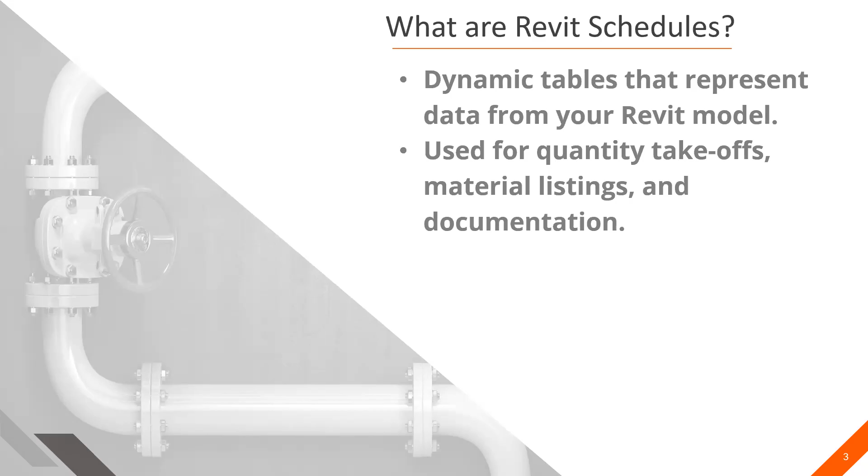So what are the benefits of using Revit schedules? They're huge. They're absolutely huge. I hear from a lot of my clients and even some of my team members that they're really not sure how to use Revit schedules, or they don't really use them. And if you're not utilizing them, you are missing huge within Revit. I use them constantly. It's a way to automate data extractions. Revit is built to leverage the smart data, and schedules are how we leverage that smart data. So don't utilize text notes and all the workarounds when you could be utilizing a Revit schedule to make that happen. It enhances accuracy and consistency with quality control and checking the data. And you can input a mass amount of data through a schedule with a couple clicks versus trying to find every little instance of that within your project.

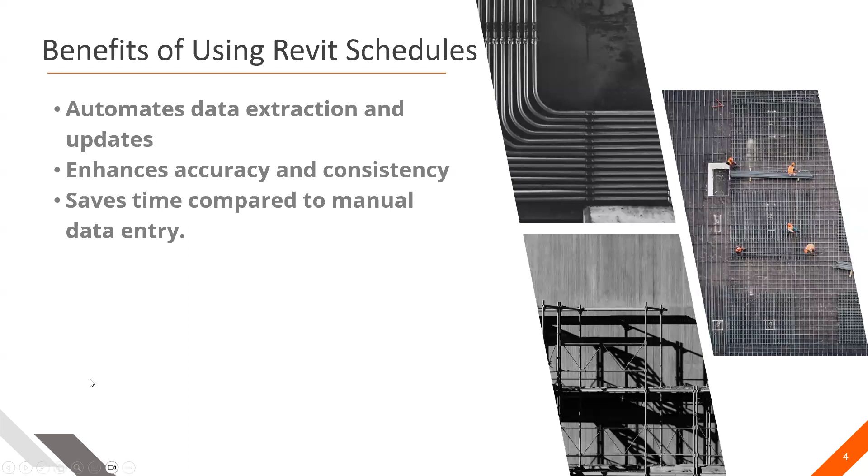And then what are the types of Revit schedules? I think the most commonly utilized would be quantities. Some people utilize material takeoffs. It's a little bit more complicated, making sure that your materials are set up right within your projects. There's key schedules, embedded schedules. That would be more like sheet list or a revision schedule within a title block or something like that. And then probably the most commonly used ones would be like a sheet legend that goes on the first sheet, or something like that of your cover sheet, to show what are all the drawings that are being included in the set.

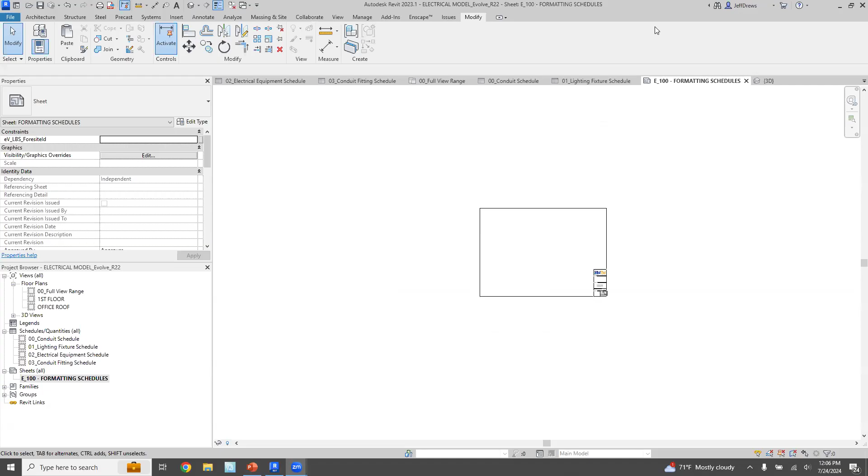I'm gonna get into kind of the demo side of this now. So I'm gonna go through four main things. And I think these are probably the lowest hanging fruit and most beneficial way to utilize Revit schedules. Number one for MEP contractors is sorting material and length in schedules.

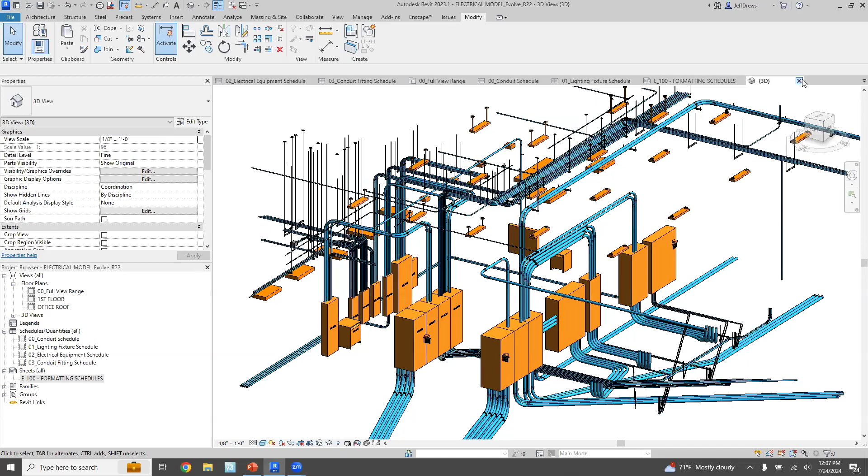So in today's demo, we're gonna kind of go through an electrical example. So we have some equipment and conduit and hangers and some light fixtures and various things in there. So we want to try to pull some of that smart data out. A lot of times we get asked by the guys in the field, can you give me rough material takeoff? I need to know how many feet of 3-inch PVC I'm ordering, or something like that.

So the way we would go about doing that would be to go into view, schedules, and then schedules and quantities. So I created this little guy off to the side here just to kind of speed it up a little bit. But when we're doing that, we need to make sure that we're selecting the proper fields. And that's probably half of the challenge when we're creating these schedules, just knowing what data we want to sort. So if I go back to my floor plan view, I can click on a piece of conduit and I can see I have different conduit types. I have different sizes, and all of these pieces of conduit have a length parameter associated to them.

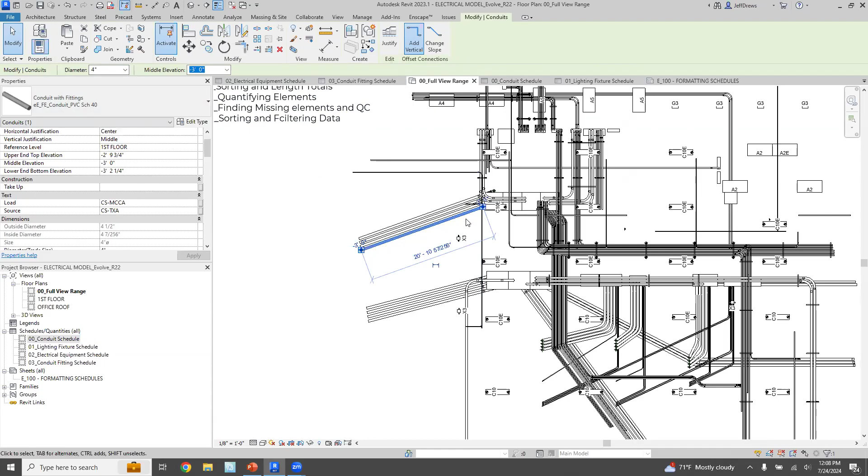So in my schedule here, I want to figure out how many total feet there are of 3-inch IMC or something along those lines. The way we do that is by utilizing these tabs off to the side. If we go into fields, making sure the right fields are in there, then we go into sorting and grouping afterwards.

We can sort by type, and then sort by size. Down here there's a checkbox to itemize every instance. I'll leave it checked for now. As you can see, everything's sorted into the proper order, sorted by type and then sorted by size.

So what we're going to do next is uncheck this itemize every instance option, and we get this more condensed list of all the different types of conduit in our entire project. So we have IMC conduit 1.5 through 4 inches, and then PVC, and so on.

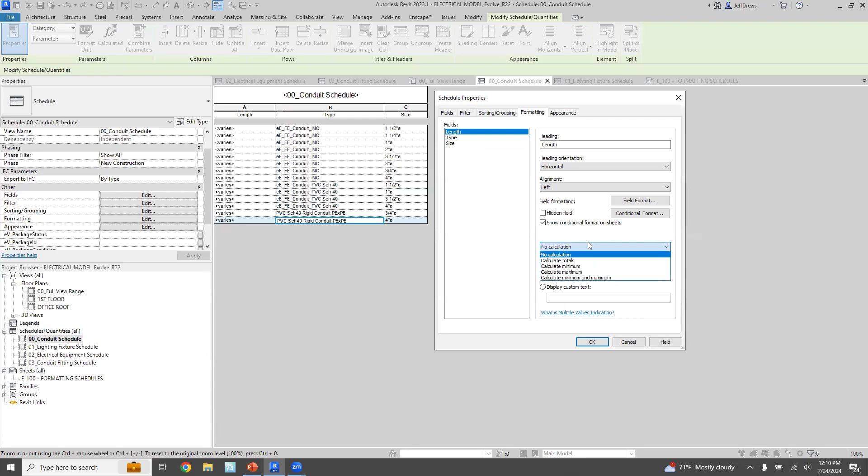The big problem now is it says varies. So we need to figure out how we get our total length from that. The way we do that is if we go into formatting and length - this is one of the most overlooked things. Right now it's set to no calculation by default. We can change that to calculate totals, and as soon as we hit OK, we have a total length of conduit, not including fittings, for all these various types within our project.

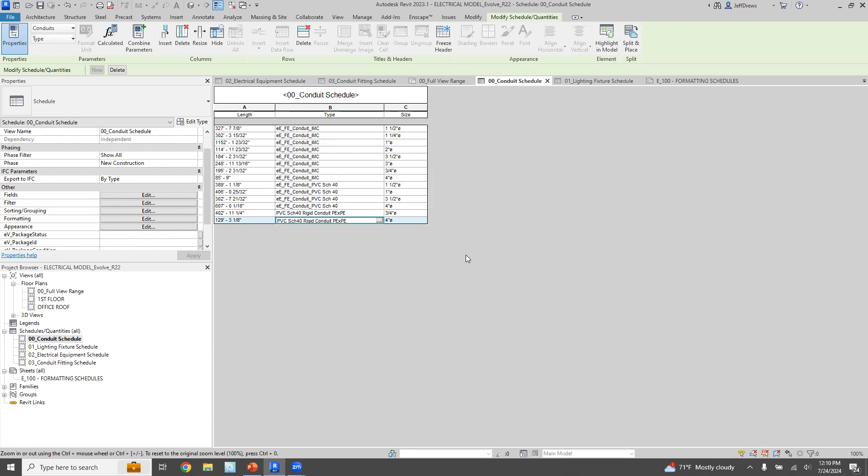So you can very quickly get a running count of how many linear feet of conduit we have, and that could be ducts or pipes or anything else. That's probably one of the lowest hanging fruits as far as utilizing that data.

One of the other most commonly asked things I get on the electrical side is quantifying things. So the same way I set up a conduit schedule, I set up a lighting fixture schedule. Very similarly, we just have a couple different parameters in here to utilize - one's type and one's count.

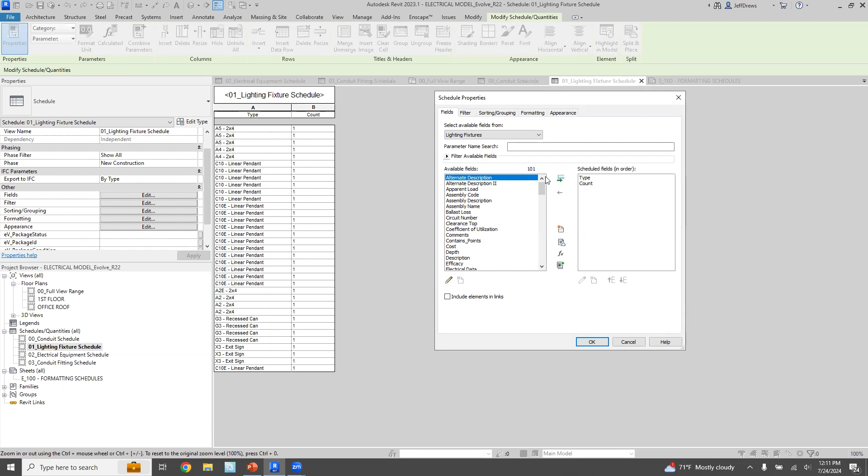Right now, similar to before, in my sorting and grouping, it comes up not sorted and not grouped by default. I want to change that to sort by type, and then I'm going to uncheck itemize every instance. Right there, we can get a quick count of every single light fixture in this project and the total number there are. So you can see A2, there's 3 of them, C10E, there's 13 of them, etc.

Going back, so we hit sorting and length totals, we hit quantity of elements.

Finding missing elements in QCing is one of the biggest gains I see from a quality control standpoint. There are so many reasons why something could be hidden in a view or missing - could be a filter, could be somebody hid the elements in view, or something along those lines. A lot of times we know it's placed in the project, but trying to find it is really difficult.

So a lot of times in my project, I'll set up what I call panel finder schedules or quality control schedules. I created an electrical equipment schedule here, and in this schedule I just added type, the submittal verification, depth, height, and width, so I can very quickly see the size and the panel name for every single one of these.

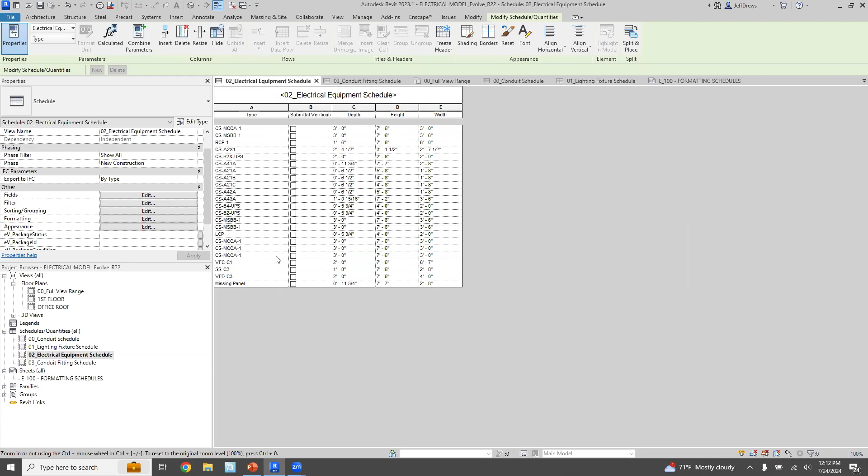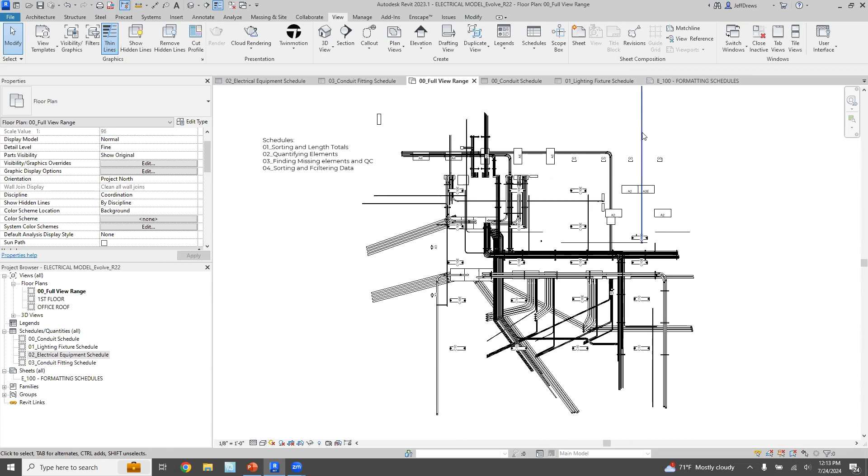I set this one up as missing panel. If I click on it and go back into my floor plan, you can see that something's selected, but I can very quickly figure out where that panel is. Instead of trying to search around and go into a 3D view and look for it and manually find it, tracking that thing down could take forever.

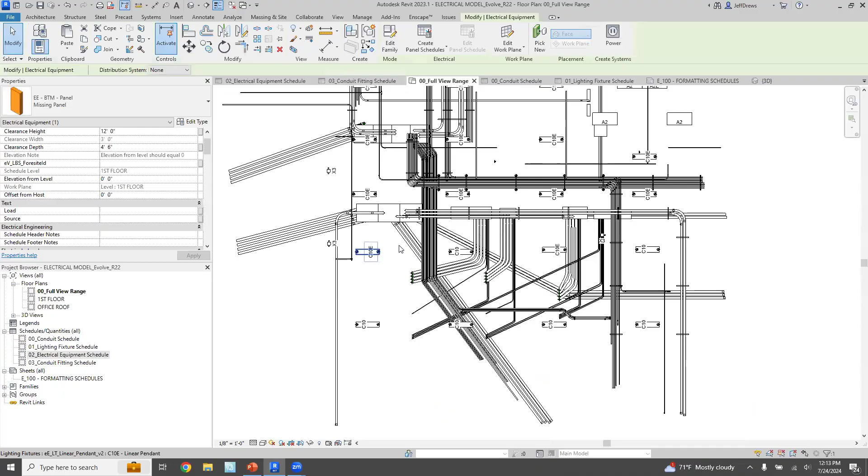But going back to this electrical equipment schedule, clicking this thing, and then clicking back into your floor plan, it'll select it right away. The other option, if it's not in that floor plan, is you can go back into that schedule, and there's this button that says 'show' or 'highlight in model,' and it does kind of the same thing - it opens up a view and shows you right there.

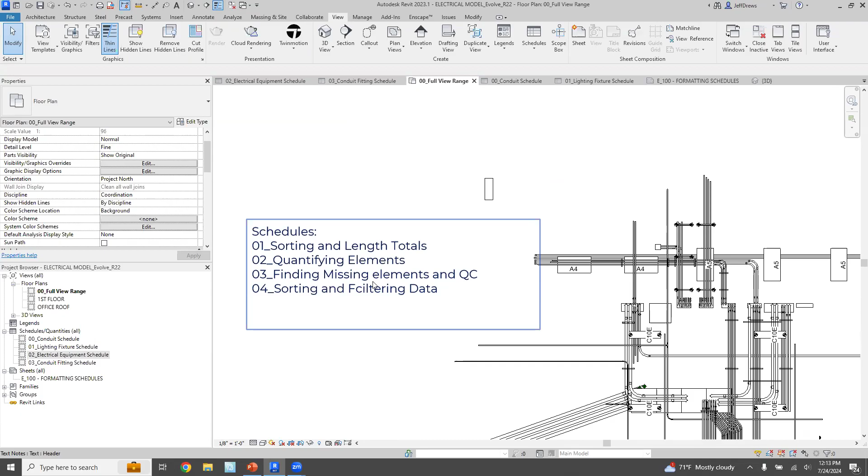I also use this view for quality control. So instead of clicking on every single panel, hitting edit type, and looking at dimensions, we can just develop a schedule to do this very quickly. I could go through all of my panel submittals all at once and verify depth is 3 foot.

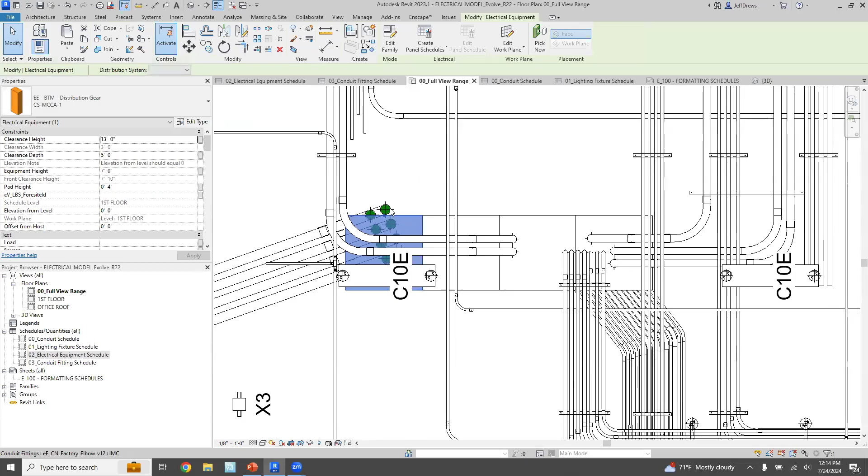Height is 7.6, width is 3 foot. That checks off, that submittal is verified. And as you hit this checkbox here, what that's doing is it's actually going into your type properties and checking that checkbox. So if you had multiple of that same type in the project, you could verify all of them all at once.

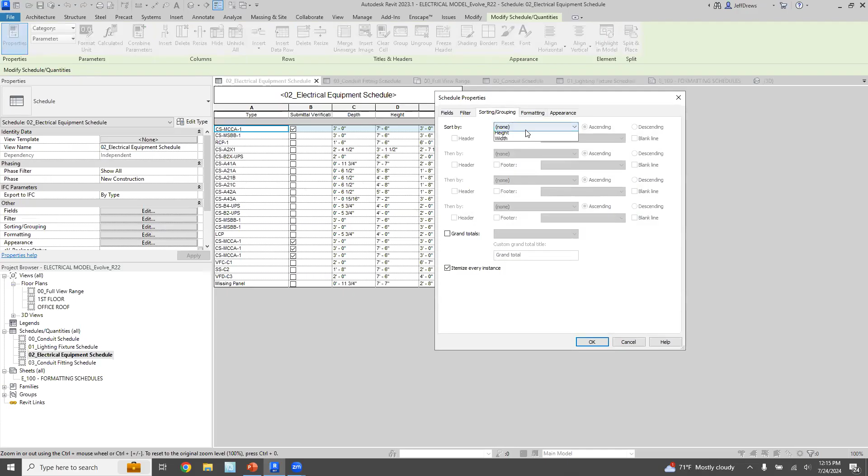As you can see, I checked this one, those got verified as well. So if they were different sizes, we would definitely need to make sure that we sorted those out. But I can go in here, similar to before, and sort by type and hit uncheck to itemize every instance. And now you can see.

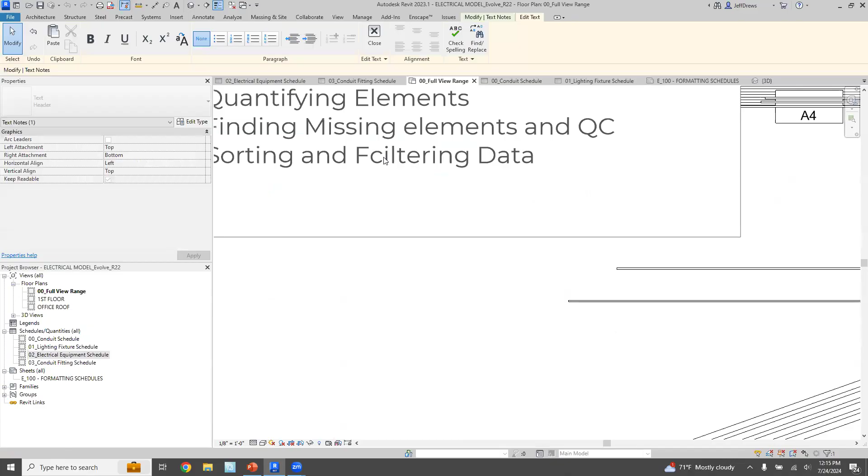All right, let's see. So the last thing I'm going to go through today is sorting and filtering data.

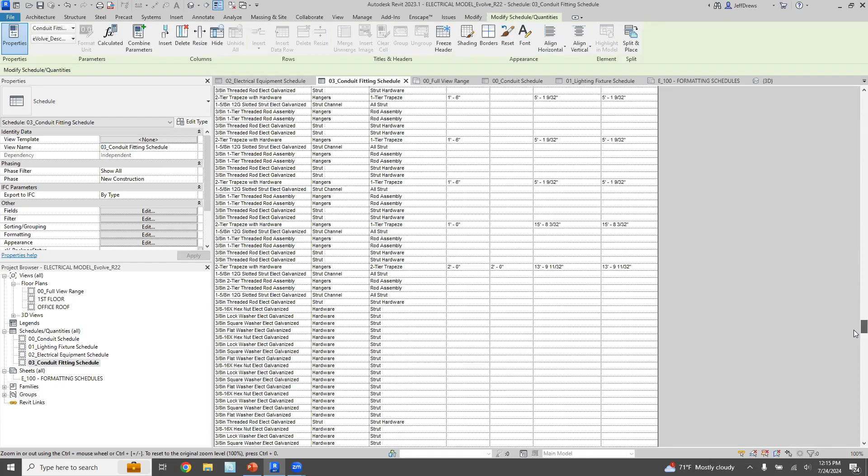When we're creating conduit fitting schedules, a lot of times a lot of categories or elements get lumped into that category of conduit fittings. So when we look at a schedule like this, it's an absolute mass amount of data. So I went through and looked at some of the various parameters within the trapeze family that Evolve has, and tried to filter down to figure out what it was that I wanted to see exactly.

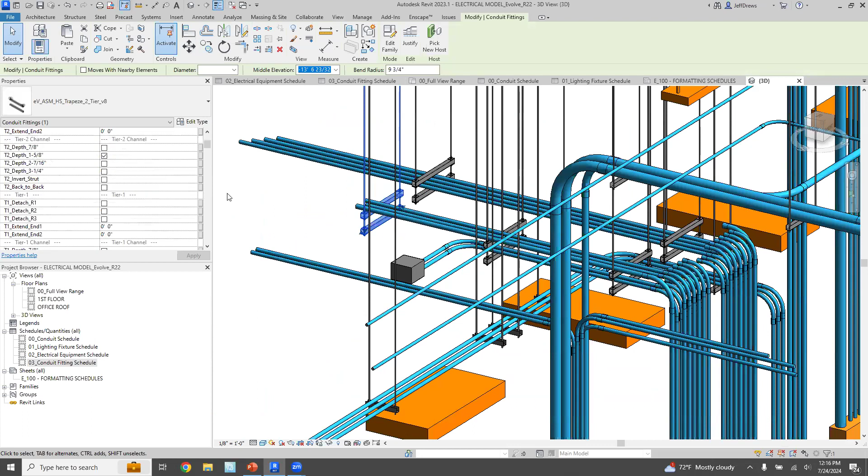Reading their parameters here, we can see there's T1, T2 parameters, rod lengths, and other things we'd want to see. If I go into edit type, I can see some other data down here. Evolve does a great job with their families of categorizing things in different ways.

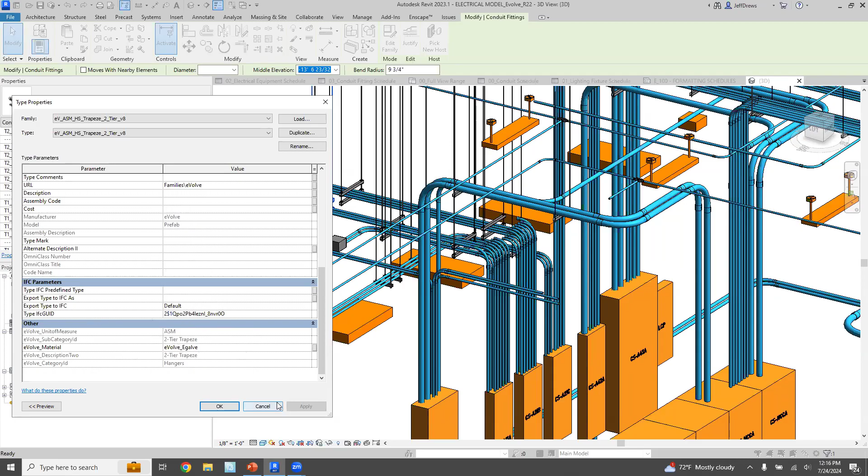So we have hangers, and then they have 2-tier trapeze, and even more if you want to go further down that way. So we can tap into that to filter out data so that those schedules are a little bit more clear and concise, exactly what we want to see.

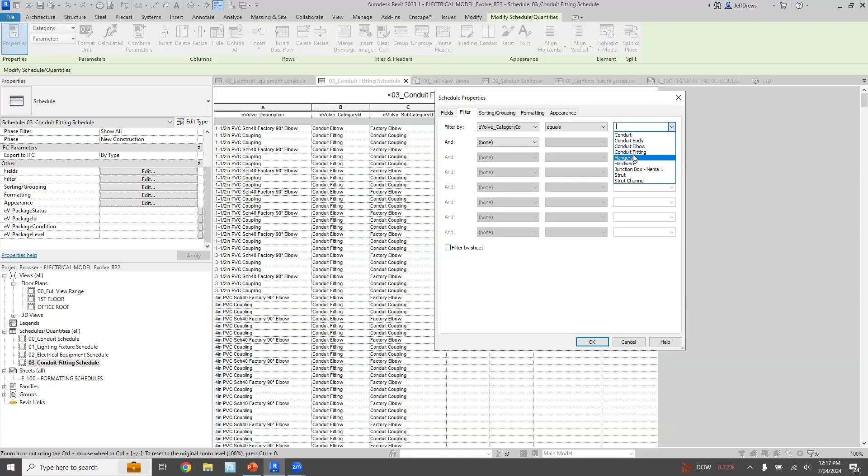So I can go into filters here, and I can filter by Evolve category, and we can say that we want it to equal hangers. So as soon as I hit OK, you can see that list dramatically decreases.

However, there's still things in here that we don't necessarily want to see. I don't want to go too far down a rabbit hole here, but Evolve has subcomponents that are shared, built into their hanger family. So you can schedule the hanger as a whole, or you can schedule those subcomponents as well.

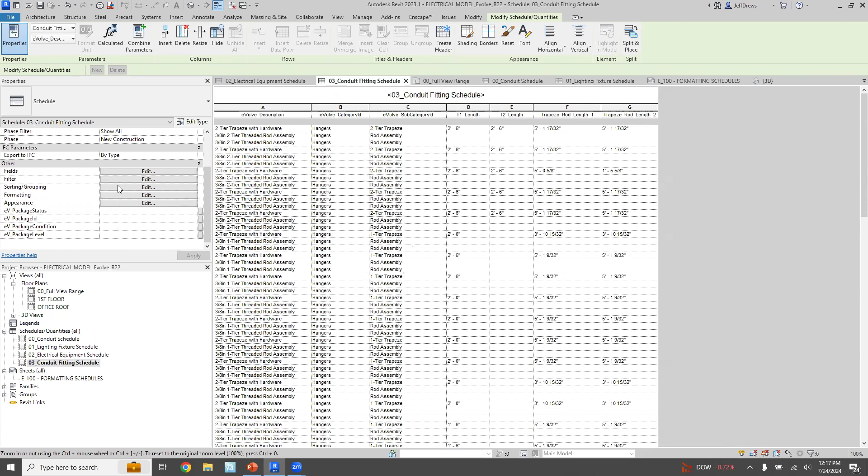So here you can see like 3/8-inch 2-tier threaded rod assembly, or 2-tier trapeze with hardware. We want to look at the trapeze as a whole for this instance, and not some of these different little pieces. So to do that, we can go back in here and go back into our filter.

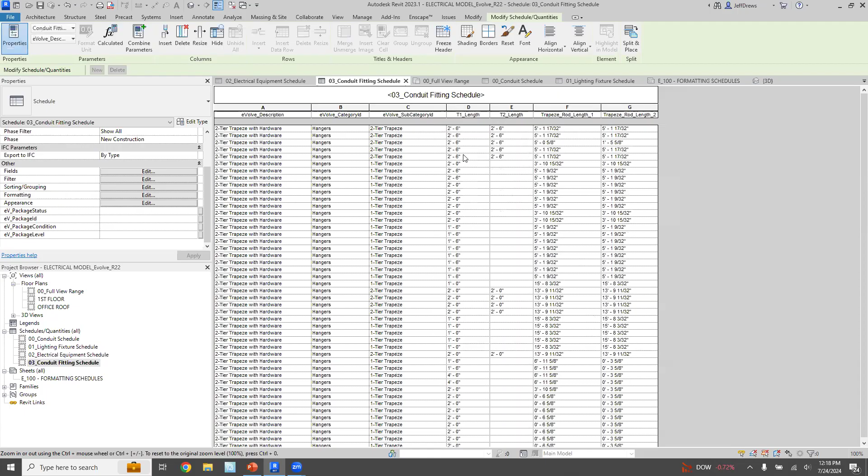Then I'm going to actually go into the subcategory, and I am going to say contains trapeze. And then you can see that this list is condensed down to just the data that I want to see.

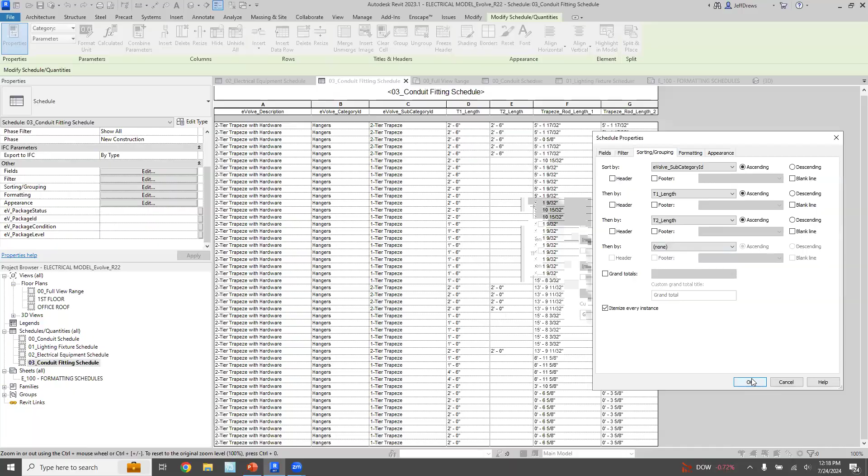And right now it's still kind of sorted goofy, so I need to come back in here, and I'm going to sort by subcategory, and then by T1 length, and by T2 length. And I'm not going to itemize every instance right now. So you get this even more condensed list.

We can see single tiers, 2 tiers. There's some issues with some of the rod lengths varying right now, but you get the general idea here of how that works.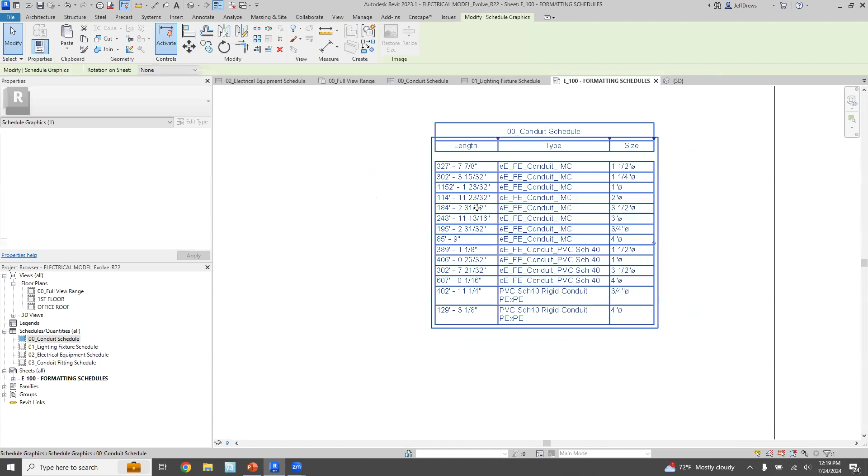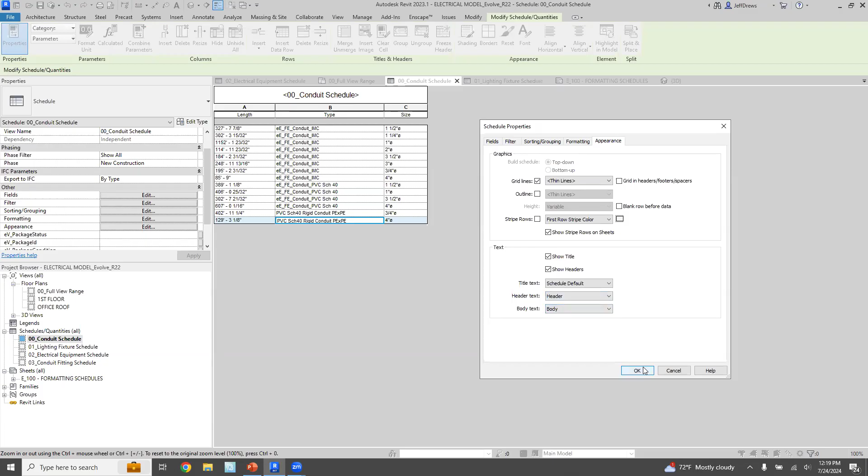There's actually some ways of formatting these schedules as well. Once it's on a sheet, if you double click on the schedule, we can go into our parameters and change the appearance of it. This is my personal preference, but I don't like the blank row before the data. And then we can go in and change the text type to have a header and a body, to match whatever your BIM standards are for your company, just to have it look a little cleaner.

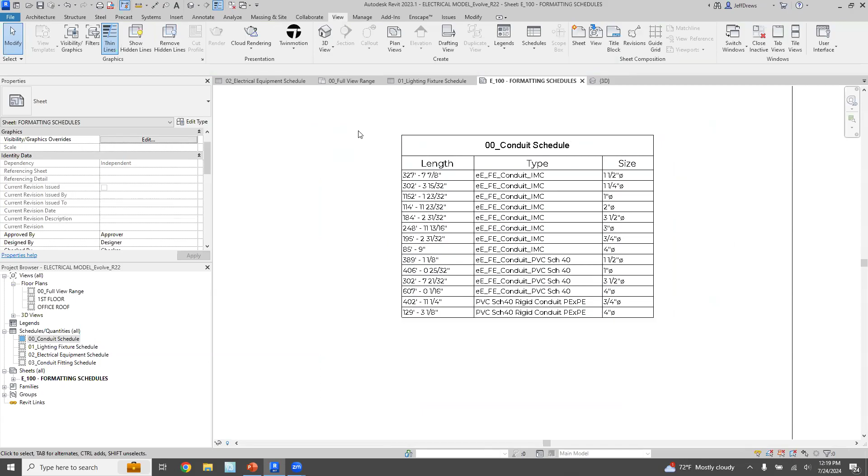So I zipped through that pretty quickly because I wanted to make sure I left some time to answer any questions that anybody had. But like I said before, a lot of what I'm going through here applies to all the different trades. It focused on electrical today, and it focused on sorting, quantifying elements, finding missing elements, QCing, and then finally sorting that data.

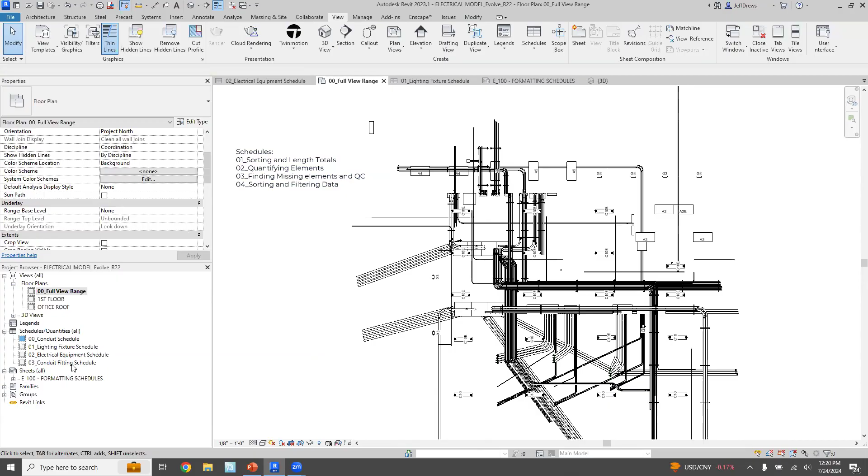The one limitation that Revit schedules have, as you can see with the conduit fitting schedule here, is we can only sort that down by 4 different parameters. So what that usually means is we have to get a little creative and create some of our own parameters to sort that data down. BIM-TM utilizes codes and things like that we could utilize to sort the codes down, and we modify some of the families that we utilize to make that more efficient for everybody.

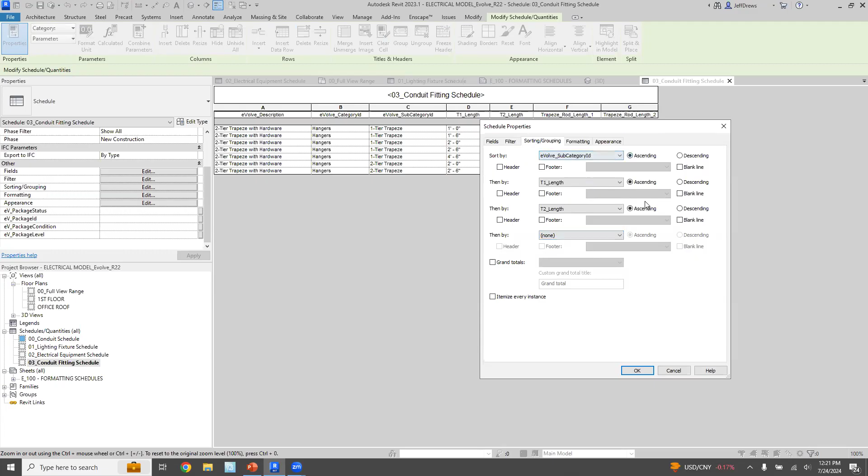I'm going to take a look here to see if there's any questions. So we have 2 different questions. First one is, can a schedule be built to include conduit fittings and straight lengths to find a total run length? The answer is yes.

It's probably one of the most confusing things that exists within Revit, but there is a conduit run schedule. It is really confusing. However, Evolve has an add-in that helps with that process. So the answer is yes. I'm not going to go over that one today exactly because that is a bit of a rabbit hole, but it can be done.

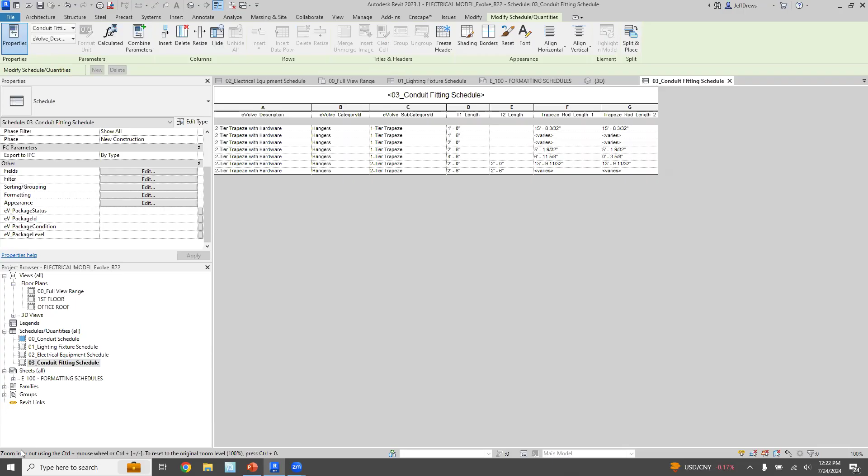The next question was, are you creating these parameters yourself, or are they built into the Evolve families like submittal verification? That is a mix of both. So if I go look at the electrical equipment schedule, these parameters here come from a BIM-TM shared parameter file. The submittal verification is built in. We're piggybacking off of the Evolve template that's provided.

But all of these schedules, like Revit out of the box, doesn't come with a ton of great data. And that's kind of why you either have to develop it yourself or you need to go to a partner like Evolve to jumpstart things and get content that's built well and templates that work really well so that building these schedules is a breeze.

The last question I have here is, is there any way to easily create schedules of equipment sorted by key plan areas or scope boxes? The short answer to that is no. The only way I found is to create custom parameters. So typically we do area on level or something along those lines, and then we would put in level 1, area A, and then you can filter down the data from there.

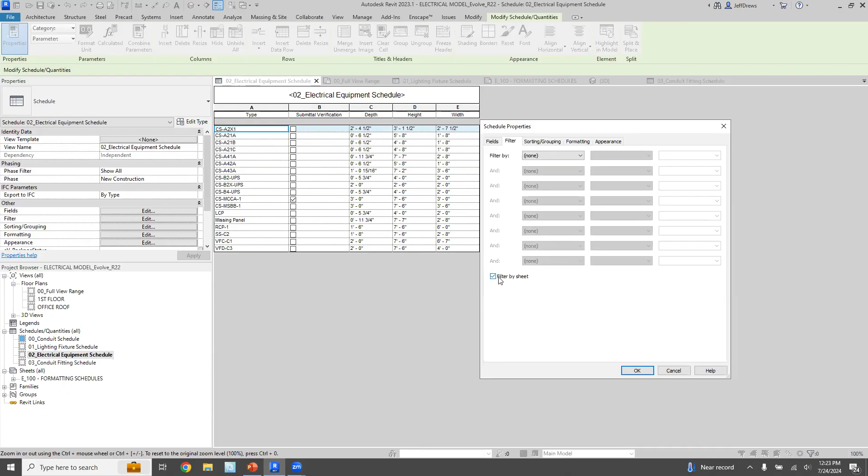Newer versions of Revit, I think 2024, maybe 2023, have a way to filter by sheet. So when you put this schedule on the sheet, you can actually filter by the elements that are being seen. The tricky thing with that is if you have multiple different areas on one sheet, it's not going to work very well. And if you have overlap on areas, it might cause issues as well.

So probably the safest way to filter down that data would be to have those custom parameters that you mentioned to sort that down.

Another question is, if I have a custom parameter as part of one family, but not all families, is my understanding that when I run the schedule, the column will be blank? I would have to have all families with the parameter to populate. Is there a way around this? Yeah, again, that's a bit of a rabbit hole, but it really depends on the parameters that you're utilizing.

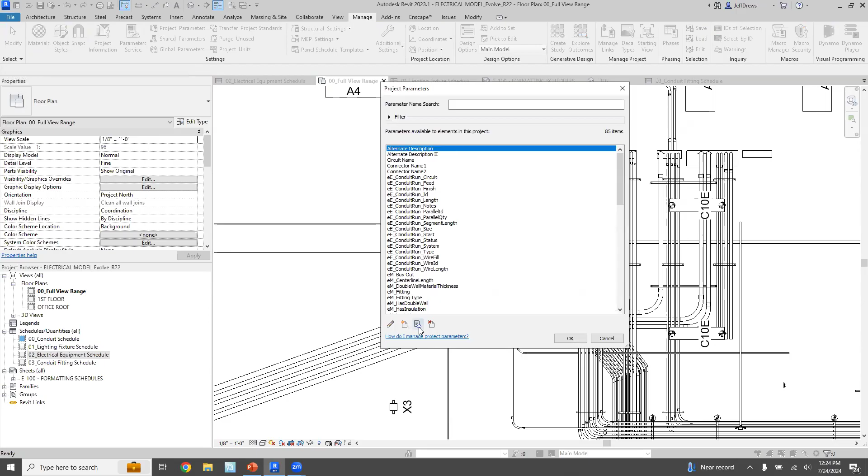We can create parameters within a project. So I'm not going to manipulate any of these families right now, but I could create a project parameter and just call it test, and I'm going to have it on all electrical equipment. And it's just going to be a yes/no parameter.

So it's all the way down here on the bottom. When we go into this electrical equipment schedule, and I go to fields, test is here now. You can quickly add, like this submittal verification, as a project parameter. Or if you had a secondary QC that was required, you could have somebody go through and put their initials in here to say that they QC'd this element. And that could be done on the project level without having to manipulate the family at all.

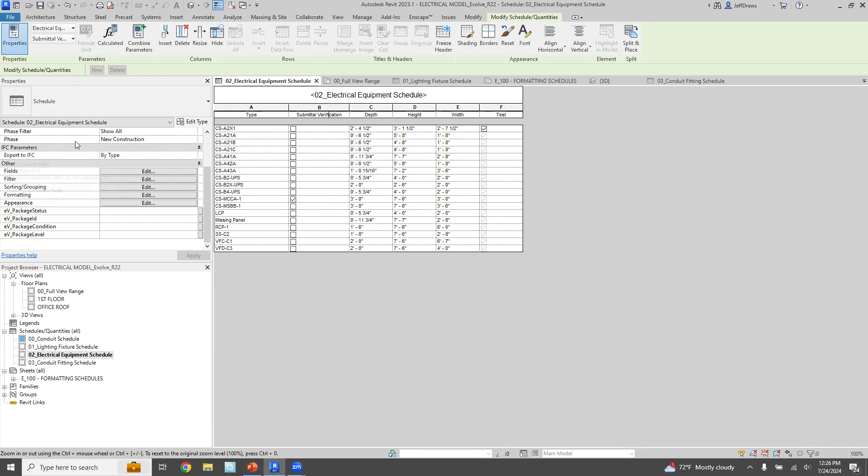Can you click on the right side of the submittal verification so you can see if it's just a text parameter? I guess I'm not quite sure. Oh, and the type section. Okay, we'll go here. So if I hit edit type, the submittal verification, it's a yes-no parameter. It's a checkbox. It is not a text parameter.

We had another question here. It says, do you have a method to change title block parameters based on information on the sheet, like change key plan instances in a title block? I do have a method for that. That is again a little bit of a rabbit hole, where you need to have nested families that are also shared so that you can tap into that data. And then you should be able to schedule those separately.

But I can potentially do another follow-up webinar to go through some of these more advanced features, embedding families and things like that, and tapping into the data. Maybe even do one where we're building families together and utilizing them within schedules. For time purposes though, we only got about 3 minutes left, so we can't really dive into that one today.

Somebody was kind of just reiterating some of the facts that I covered there, but you can use Evolve's location tool to create schedules for specific areas. So yeah, they have a custom parameter developed for you to sort that data down a bit more efficiently instead of having to develop custom parameters yourself. That's absolutely correct.